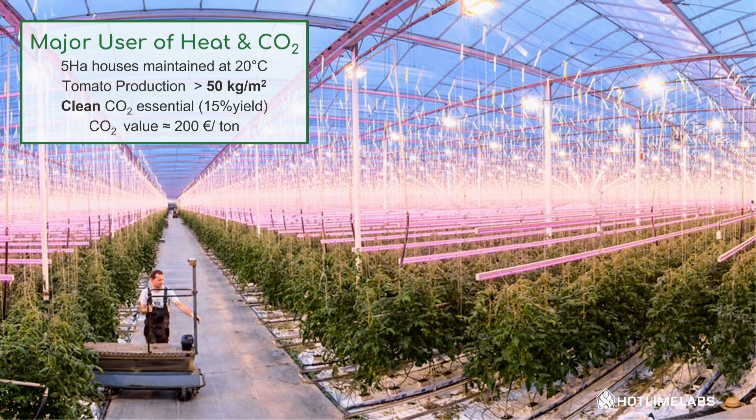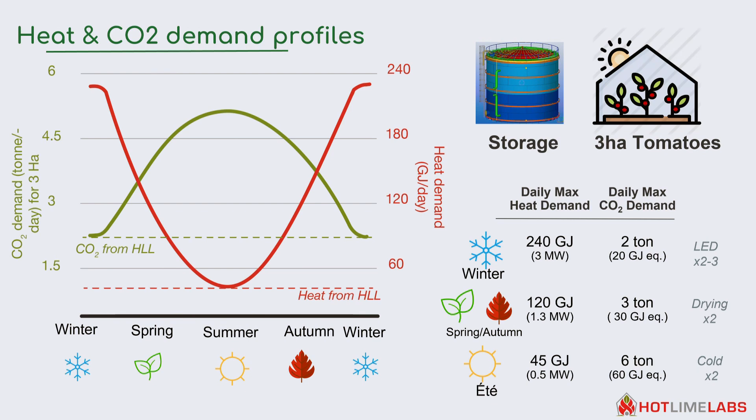One intriguing fact—really difficult, so please don't spend too much time on it—is that the CO2 demand and heat demand of a greenhouse are decoupled. Plants grow during the day, not the night, but need most of their heating during the night. Conversely, in winter they need much more heating but there's not so much sun, so they use less CO2. It's a very complicated subject, and things get even harder when you start using lights or cooling.

You can summarize this by looking at an average cold climate greenhouse, a 3 hectare greenhouse growing tomatoes. On the inputs, on the left-hand side, we need to input 36,000 gigajoules per year, which corresponds to about 10,000 megawatt hours. You need to put in 360 tons of CO2—a minimum level of enrichment, which can go up to 3 times that. This is clean CO2 to enhance production. And then you need some electricity, not a huge amount, plus fertilizer, labor, etc.

For this analysis I'm focusing on the heat and CO2. What comes out and pays for everything else is the 1,500 tons of tomatoes you generate. A 3 hectare greenhouse is not very big—the ones you saw at the beginning were all about 6, 9, 12 hectares in blocks. So the tomatoes pay for everything else, and on top of that you end up with green waste. Plants that generate that much crop obviously generate a lot of waste, as well as some plastic waste.

Interestingly, the emissions of CO2 from the heating actually weigh much more than the tomatoes you've generated. So the industry has a fossil fuel problem, but it also generates the possibility of replacing the CO2 and doing carbon capture, sequestration, and utilization. The utilization is simple—if we can supply CO2 to the greenhouse, they will very happily pay for it.

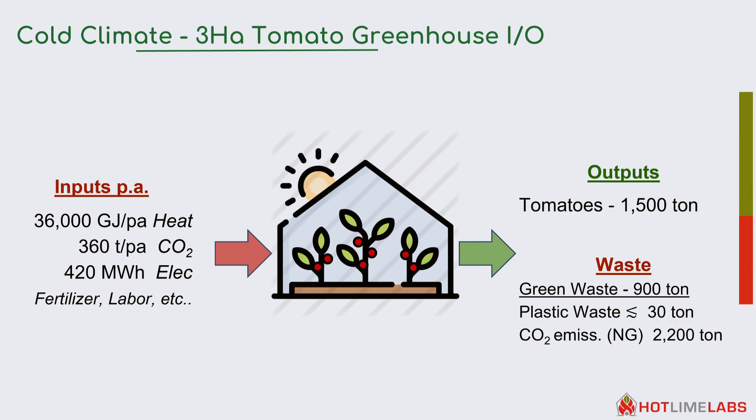Another aspect we discovered while working through this is that this green waste represents a massive potential if it can be turned into biochar. Because if you can do that, you can start forming an economically positive carbon cascade. CO2 comes out of the sky and is absorbed by the plants. We turn it into char, heat, and CO2 that we get paid for—paid for the CO2, paid for the heat. Then the char can be used in a variety of applications, as I'm sure you know about biochar, and finally buried into the ground.

The cost of biochar is effectively subsidized by free feedstocks, because we have those 900 tons of green waste to process, and also by the fact that growers will pay us for the CO2, and by the fact that we can provide them some of the heat. So it becomes a price negative, carbon negative scheme.

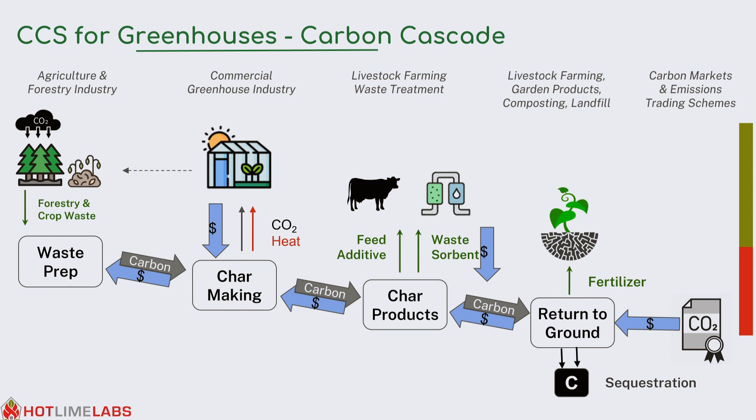This is very exciting, and this is what my company is working on making a reality. But if you add it up for the whole global industry, you end up with the potential of capturing and storing about 110 million tons a year by 2050. That's actually quite small compared to the target of 20 billion. However, what's really unusual is that you can do this while generating value for the growers and for the economy—like no other industry worldwide.

My message to take home is that doing CCU in greenhouses is really the low-hanging fruit, because we don't require politicians to agree on subsidies—the system just funds itself. This is why we're doing it, and I'm sure other people will come along for the journey as we go along. So that was part 1 of my presentation.

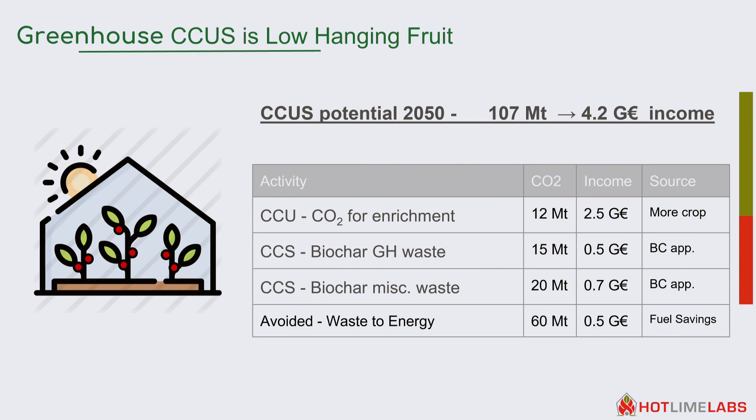Part 2 is about Hot Lime Labs, the company we're working on, and how we are planning to try to achieve some of this potential.

First of all, we've developed the central box of the process, which you can feed with crop waste or wood waste. We use a gasifier of our own making that turns that into a syngas and a quality char that we can use. Then the whole magic resides in these hot lime materials—essentially a mixture of limestone and iron sand that acts as a CO2 sponge.

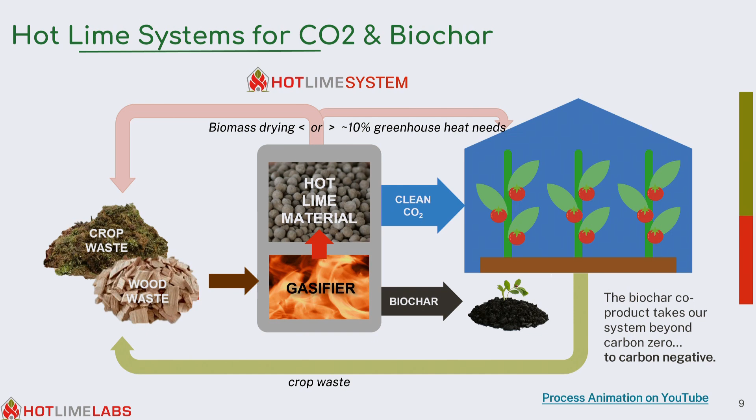I'll tell you a little more in a second, but basically what it can do is separate CO2 from a mixture of gases. That clean CO2 is sent to the greenhouse. The heat we can either use for drying the feedstock or supply to the greenhouse. And the greenhouse sends us the crop waste—so it's kind of like a circular economy setup.

We use a fixed bed reactor to make things really simple. That's because the demand is not continuous. As I said earlier, plants don't really grow during the night. So during the night we need to give them heat, and during the day we need to give them CO2.

So this is how our machine works. Every night we turn up the fire. Just waiting for that. Here we go. Turn up the fire and run the gases through this hot lime material, which is effectively a CO2 sponge. The hot lime material grabs the CO2 and lets the other gases go out to the stack.

Then during the day, when we want our CO2 back, it's enough to blow some air into it. A bit of magic chemistry happens, and the CO2 comes out, and it has never seen a fire. So none of the pollutants that were possibly in the fire are now in the CO2, and we can safely feed it to the plants.

For those of you who are more technical, we actually use a combination of calcium and chemical looping technology. If you want to know more about that, come and see me after the presentation, I'd love to talk about it.

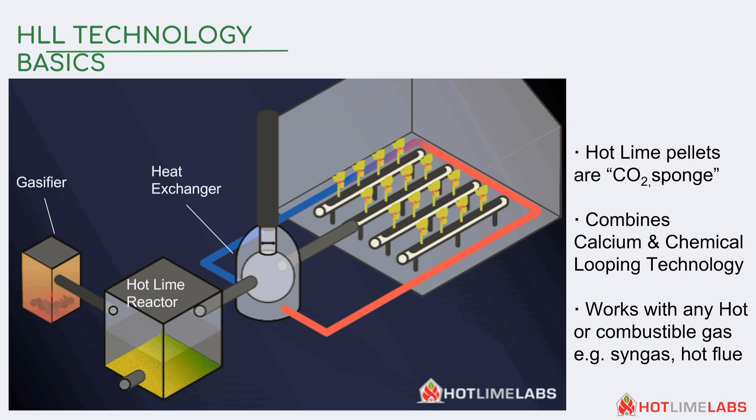Our system works with any hot or combustible gas. However, we do need it to be above 700 degrees, which limits the potential for retrofitting existing boilers. This is why we prefer to have a package that does everything ourselves.

So this is a brief presentation of the system. We have a hopper that takes the feedstock. We've designed our gasifier to take a variety of feedstocks, primarily the green waste from the greenhouse, but also forestry waste, wet, large, small, etc.

It is an updraft gasifier for those who are more technical. The feed goes to the gasifier, turns into a syngas and a char. The biochar we sell, in our case to animal feed. We've discovered it helps animals avoid parasites, and New Zealand, as you might know, has vast numbers of cows and sheep, so we've been actually feeding it to the animals.

The gas then goes to a reactor where the hot lime material lives, and it does the CO2 capture separation magic. Then the hot gas goes to a heat exchanger—in this case we use air, but you can do water. Finally it is directed either to the stack, to the atmosphere if it's during the night, or to the greenhouse during the day.

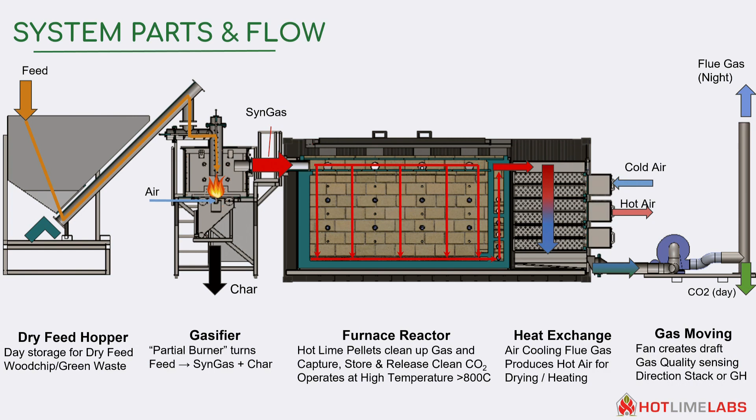I've been working on this for the last 7 years now, and we started off, as many of these technologies do, in a tiny little reactor making 100 milligrams a day, and we have been scaling up ever since in our labs and workshops. Being in New Zealand, we've had to build everything ourselves because it is a tiny place.

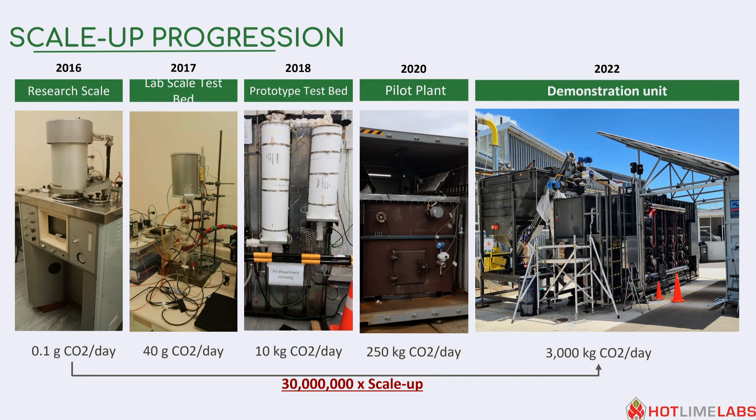Over the 7 years, we've taken it from a research scale to a demonstration commercial unit which makes 3 tons of CO2 a day. That unit is now happily sitting at our first customer, who is stoked—I think that's the technical term—finally having access to CO2. Much like your grower, Sonia, the closest other source of CO2 is 400 kilometers away, so he's very happy about that.

You can see our machines there are built out of containers. That's actually on purpose, because one of these can cover about 3 hectares of greenhouse, which is kind of a standard size. We are looking to do economies by numbers rather than scale, because it makes little sense to make them much bigger. We are planning to make many times the same one and equip a greenhouse with multiple units. Like this one will actually take the next 2 units for us.

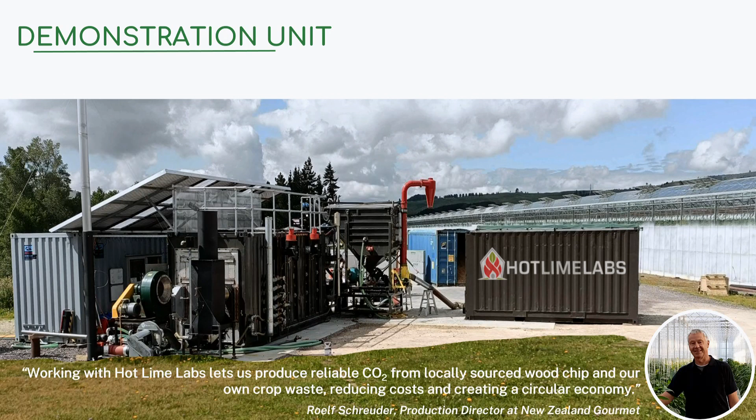So to complete where we are at for Hot Lime Labs, we are finishing off the demonstration unit and optimizing it, and preparing, as I said, for doing serial production. The first units will go to New Zealand, but very quickly we want to come to Europe, because this is where the world's greenhouses are—about 50% of them are here. We're looking to deploy one next year.

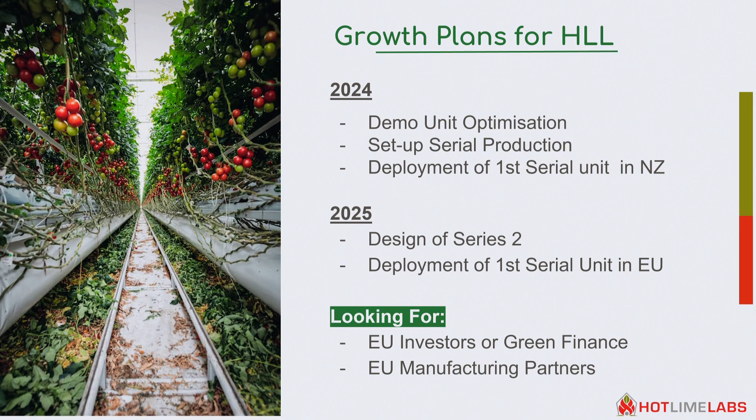Yeah, I remember when we discussed that you were planning to move to Europe. What we didn't discuss actually is, at EU level, we have several policies coming up about CCU, and several of them include a transport section for CCU. So I think this goes directly into your business, because you have to transport, you said, up to 400 kilometers. This actually avoids the transport of CO2.

Sorry, I didn't elaborate on this topic, but the only other source of CO2 for greenhouses is purchasing liquid CO2, which typically comes from refineries. And if your greenhouse is not close to a refinery, then you end up having to transport it over 400 kilometers. So what we can do is, because we can transform local wood into CO2, we can completely avoid that transport. It's one of the main advantages of our technology.

That's the advantage in most CCU products, that you use the industry that is next to it. Yes, that's right.

I was just wondering, your project that you've just first set up, have you actually got carbon credits from it yet? Well, no, this is not actually properly recognized as CO2 avoided, even though technically it is, because we're displacing something of fossil origin by something that isn't. So we're not able to claim any carbon credits for the CO2 avoidance.

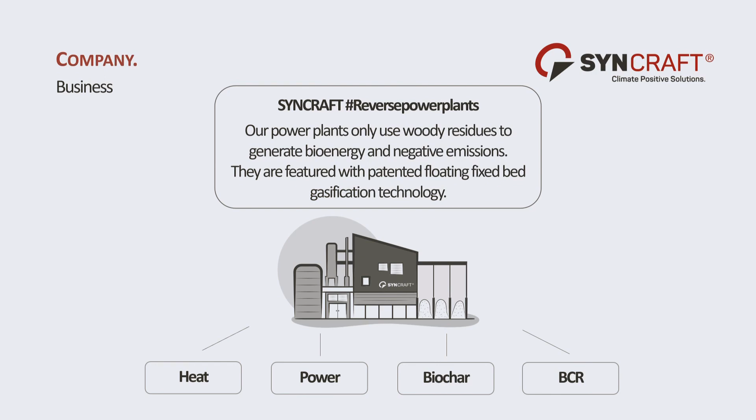I just want to, in terms of time management after a very long introduction, I'm sorry, jump into what we are technically doing. We are producing plants that produce power, heat, biochar, and carbon credits based on the biochar.

And what we are built on is we do the opposite of what we heard before. We have developed a more complex gasification system that turns an inhomogeneous fuel like forest residues, containing bark and needles, into a very homogeneous gas and a very homogeneous biochar, through a multi-stage process. And how do we do that? It's quite simple, we just follow the process that happens with biomass anyway.

We pyrolyze it in the first step, putting some air in, so we turn the biomass into biochar and into a nasty gas. In the second step, we burn these nasty gases, so all the tar issues and nasty things turn into CO2 and water vapor, nothing more. Combined with the biochar, the carbon we produce, we then recombine these three elements, carbon, CO2, and water vapor, into our synthesis gas and pure carbon.

So what happens is we end up with a third very valuable product stream, a biochar of about 90% carbon, all of it fixed, so very mature inertinite. Then we go to a condensation unit and end up with a very cold and clean, dust-free gas, which we can send to the most advanced engines existing at the moment. We end up with an exhaust gas that we call CCS-ready. It's cool, about 35 to 40 degrees, it's moist, and it's perfectly prepared for a further CCS step.

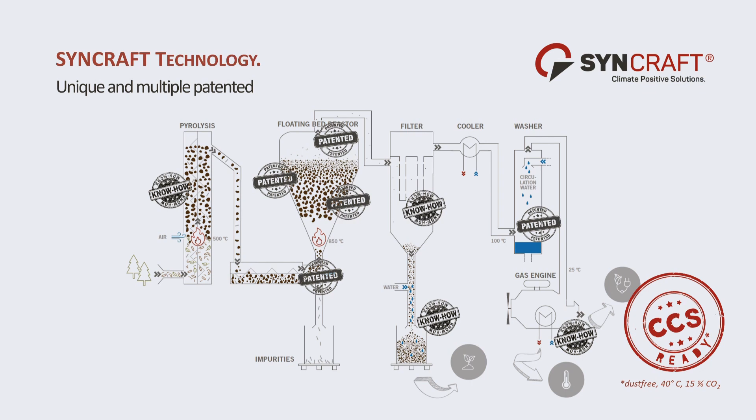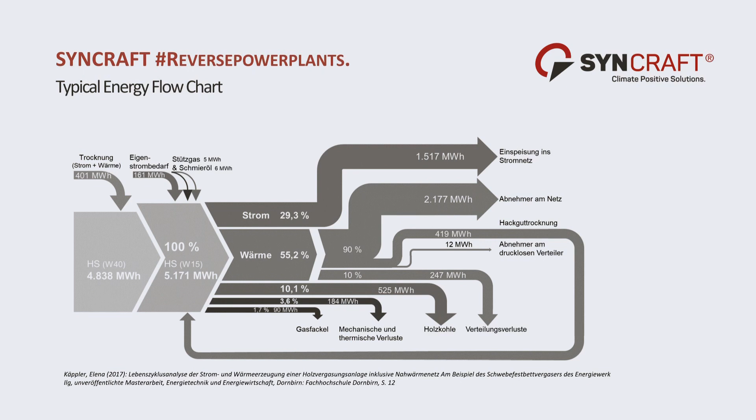We also have, in the slides they'll provide later, a Sankey diagram showing how far we go towards electricity. So the focus is really on producing decentralized electricity at high efficiency, but the share of biochar is not negligible either.

So it's always important to talk about economics. We can't compete with PV installed at big scale in certain places, but that is not the goal. We can also operate and provide this energy on a renewable basis during night and during winter. When you think about a renewable energy transition, you also have to take care of nights and winter. This is not a one-stop shop idea, it's a combined approach where these units can be one piece of a big puzzle to cope with climate change and defossilization.

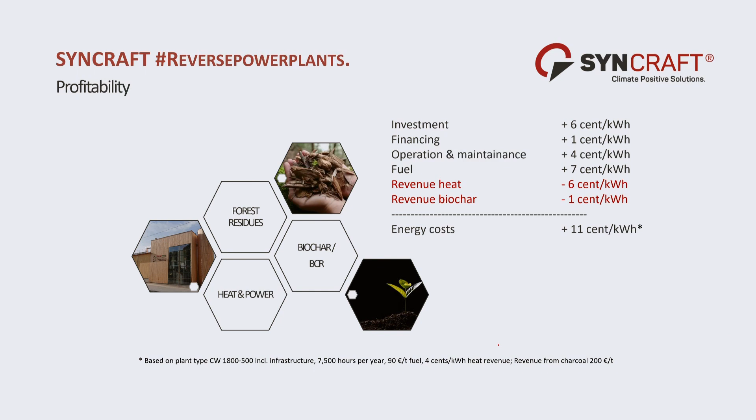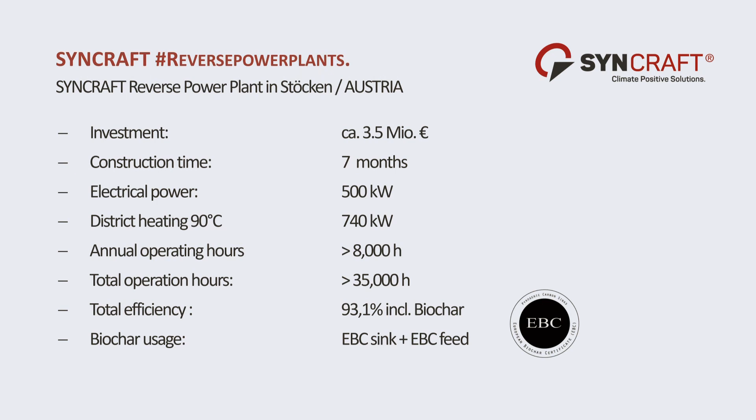Coming back to this love story, we have an up and running plant with almost 40,000 operating hours that we will retrofit in Austria - an existing biochar plant. You see the engine in some pictures. These are the rough numbers of this plant, and this we will retrofit with a decentralized CCS unit.

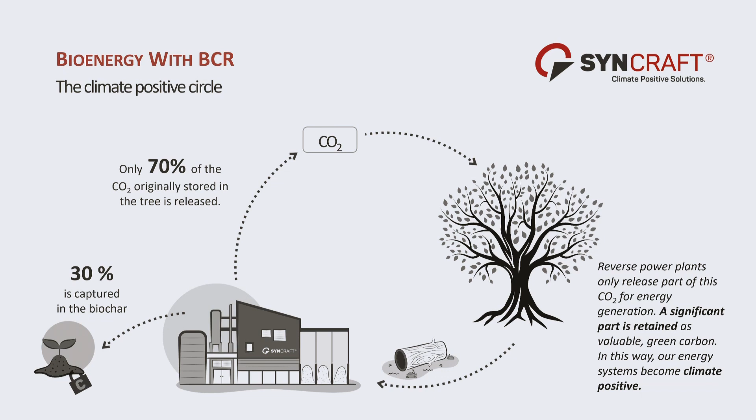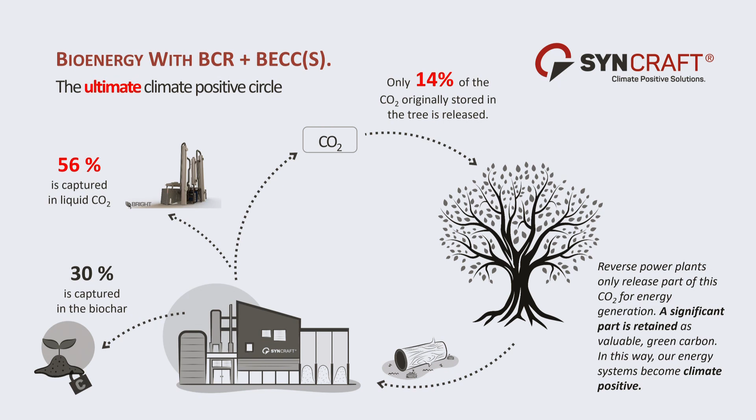What is the reason we are so eager to do so? Because we claim to be climate positive, that we are already on a sustainable fuel and on the biochar. But the thing is, we still release 70% of the originally stored CO2 to the atmosphere. Even if it's CO2 neutral, this has to be considered. When we combine it with a CCS plant, we also produce this green soda, but we only release 14% back to the atmosphere. So the leverage we have with such a plant is far bigger to go even more climate positive.

What to do with biochar? Maybe just a brief info from that floor - there's a bigger, better floor at the far right, at the biochar section. But we have companies here that do awesome climate concrete, Castorcon for example, or Ecoloct. So you really can increase the abilities of concrete - not only make it greener, but also make it more durable.

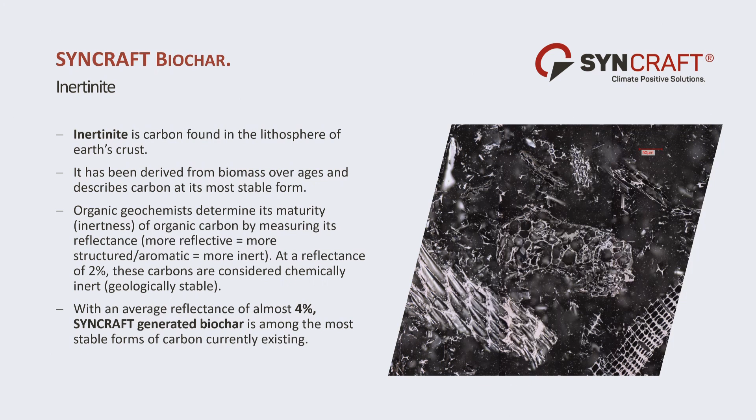The inertinite, as I've said, is the most durable thing you can produce to store away CO2. And the prices of biochar compared to all other forms of CO2 sequestration are today a bargain - this is a matter of fact. So even if you pay 200 euros per ton for the CO2 with biochar, there is no other path at the moment up and running on a commercial level that can compete with these prices.

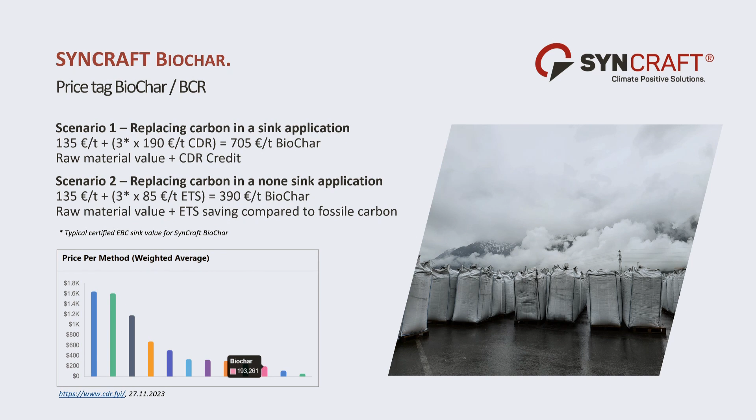When we talk about the durable path, I do not talk about afforestation, which is crucial and important, but we can't credit it, or we should be very cautious about crediting those things. That's my personal opinion. Just some numbers, and now I'm sure I'm already over my time, but I'm glad to hand over to Ivan to explain the BECCS part of our project.

Thank you, Marcel. I'm from Bright Renewables. We take care of the other part of the love story, which is the carbon capture part, which works really well with the gasification system of SYNCRAFT. So the love story started for us together with SYNCRAFT with a project in Austria, where we will be producing food-grade CO2, which will be used in local soda manufacturing to actually replace fossil fuel CO2.

In terms of the systems we provide, we have two technologies: the more conventional amine solution, which we use for bigger systems - up to a 20 megawatt biomass boiler. But we also produce smaller systems - the amine system down to approximately 3 megawatt boilers. We can go smaller too, but then we switch to a different technology, the PSA system. The SYNCRAFT system is exactly in the middle, so we can choose which system to use depending on the situation.

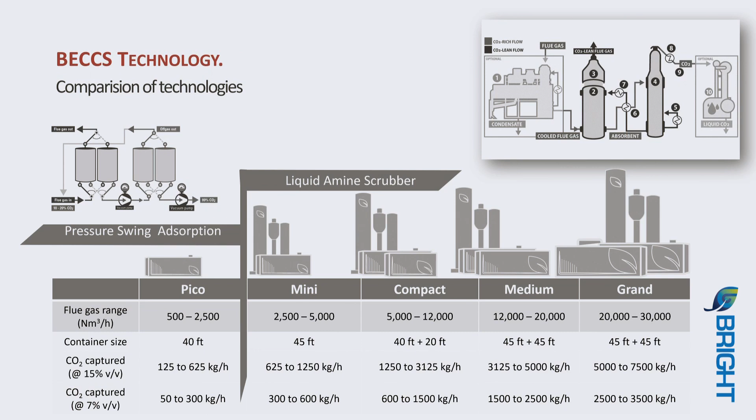A brief high-level comparison between the two technologies: the capture efficiency is about the same, though you can capture a little bit more with the amine scrubber. The main difference is in energy usage - the PSA system uses 0.15 kilowatt hours electrical, and the amine scrubber uses only a third, so way less electrical consumption. But as a trade-off, the amine scrubber requires heat to run, where the PSA requires none, making it very easily integrated and also easily retrofitted.

A final comparison is the CO2 quality you can produce. With a PSA system, because there's not a complete physical separation between the raw gas and the product CO2, you cannot get up to food grade quality, so you produce industrial grade. With the amine scrubber, you can produce food grade.

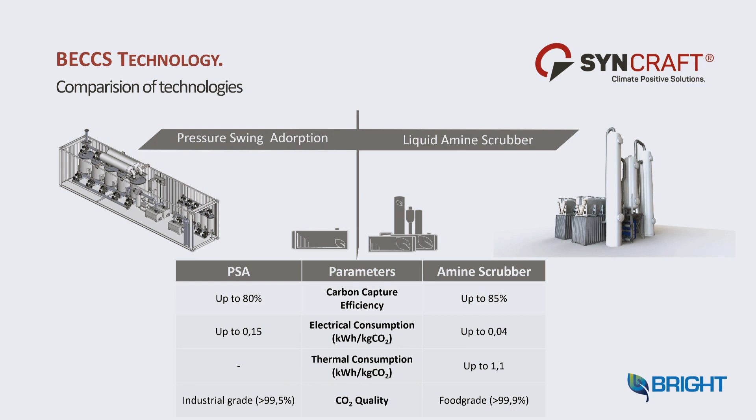This is an example of one of the systems we built in the past, and we can also combine them with liquefaction systems. The carbon capture system is only one part of the solution - in order to be able to use it elsewhere or to transport it, you also have to liquefy it. If you don't liquefy it, you have to use it locally, and for that we have a separate module which can or cannot be installed on site.

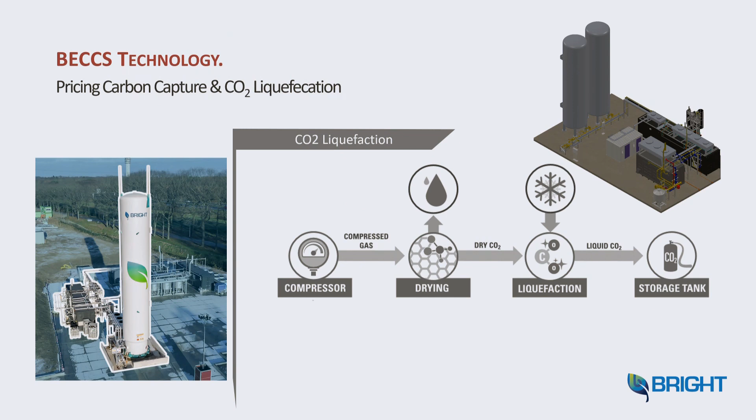So then, very briefly about the economics of the system. The system we're looking at together is subsidized, and that is also what makes it profitable here. With the subsidy, we have an operational cost of around 80 to 100 euros per ton of CO2, which makes it profitable because the selling price is above that.

But without the funding, it doesn't make sense for this scale. For bigger scales, for the larger scale systems we sell, it does make sense, because then we can get an operational cost of 80 to 100 euros without a subsidy.

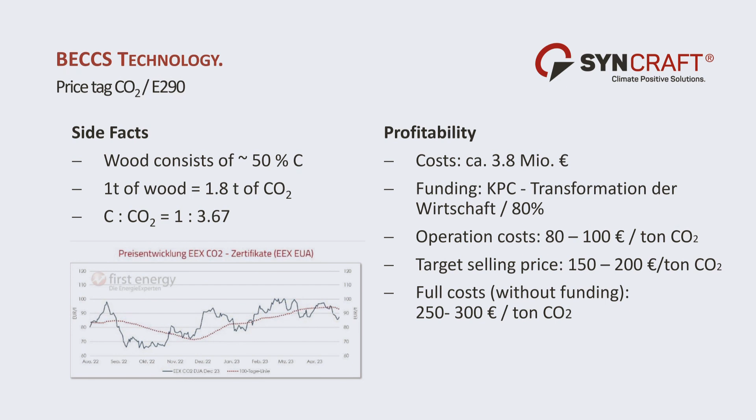So the CO2 applications were already mentioned by my previous presenters, but mainly maybe about the biogenic CO2. We are able to capture it with relatively low-grade heat, below 100 degrees, making it possible to use waste heat, which is available in the SYNCRAFT system and in many other boiler systems. It is really a regional to regional approach, local to local, because then the production matches with the use of the local CO2 users.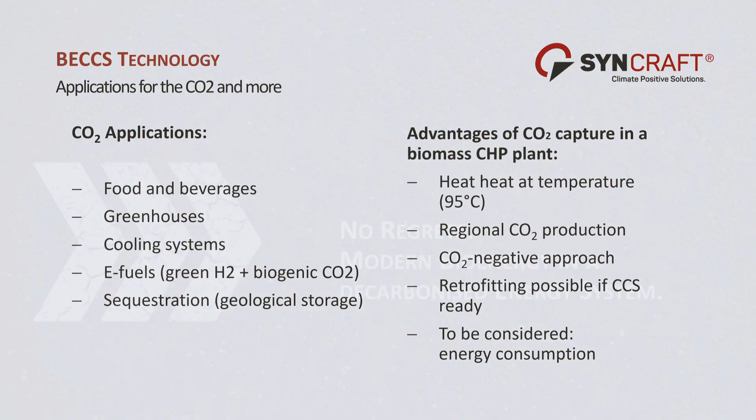Together with SYNCRAFT, you have a CO2 negative approach, because you store CO2 in the biochar, and then the CO2 you emit, you give a further life by using it or by storing it underground, if possible. So I think that sums it up.